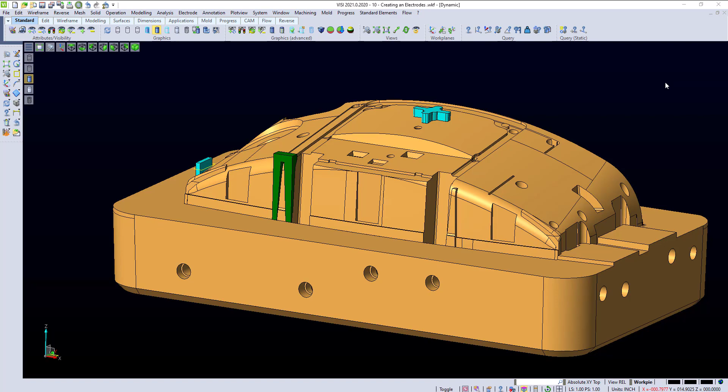In this video, we're going to go over the process of putting a holder on an electrode that you've created. To do this process, we're going to go into Electrode and down to Electrode Manager. Inside of Electrode Manager, we're going to add a new project. You have to put a name to the project, the other ones don't matter.

Then we're going to select the workpiece, and the workpiece will come in as whatever the workpiece has been named in. And then you need to name the EDM group. This group could be whatever you want the group name to be. If you wanted it to be named cavity or core, you could name it whatever you'd like.

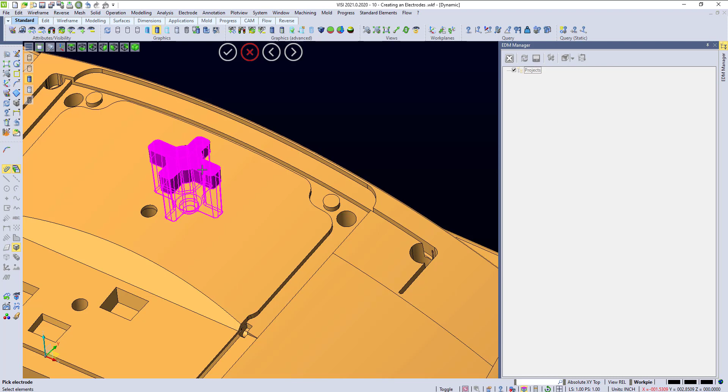Now it's going to ask you to pick an electrode. So we're going to pick this electrode, and it'll tell us that this electrode, this solid, is not an electrode. Do we want to define it as one? And we're going to just click yes. Once we click yes, you'll see that it starts to create a stock block on the back of the electrode.

With this stock block, it's real simple and easy to change the sizes of this stock block to whatever size you desire. You can also change the total height of the electrode, or you can come down and change the location.

If we want to put it on even numbers, it's as simple as just clicking this up, and we instantly put it on even numbers. It makes it very quick and easy to make sure your electrode is centered on even numbers to be able to post to the burner easier.

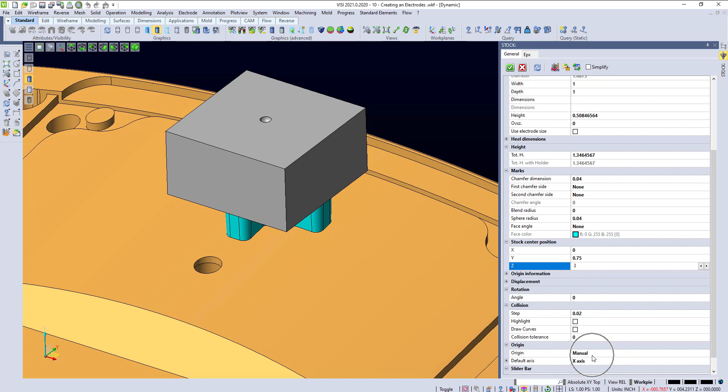The other thing we want to do is we want to make sure that we are in the manual origin mode. And what manual origin mode allows us to do is to pick the machining location for the electrode once we've made it.

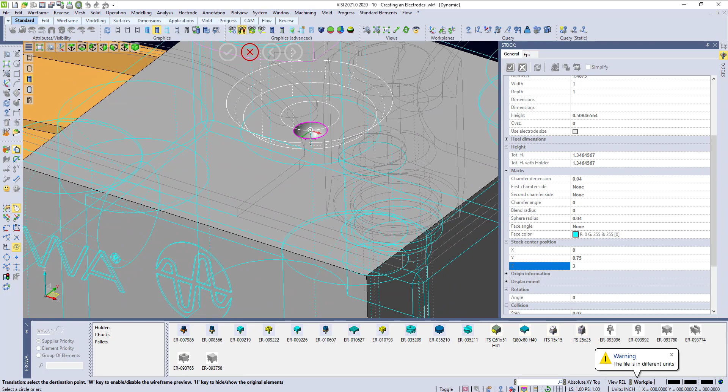Now what we can do is add a holder from the library. So I can go in here and pick one of my EROWA holders. If I hit the W key on the keyboard, it moves to wireframe and makes it real easy to place this holder on the back of the tool. Once the holder is placed, if you don't have enough height, you can come into either the total height or the Z value and bump that height up.

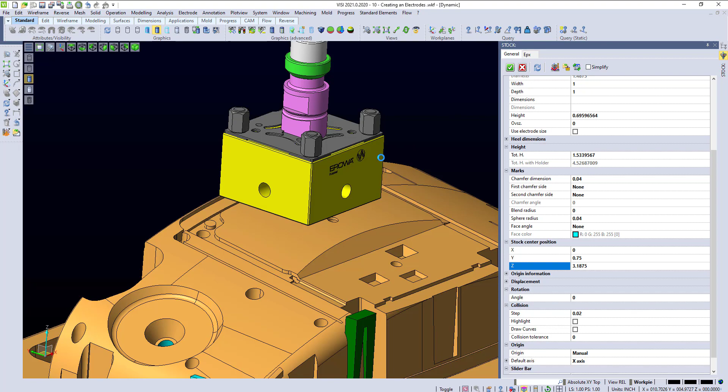We have another option that allows us to check for collisions. I can check for collisions, and it'll check this part to see if this holder hits the job anywhere, and it tells us that there has been collisions detected. So it lifts the holder up the amount that it was colliding by. Since it lifts it up by that amount, what we're going to do is just crank this number up to get this holder up and out of the way.

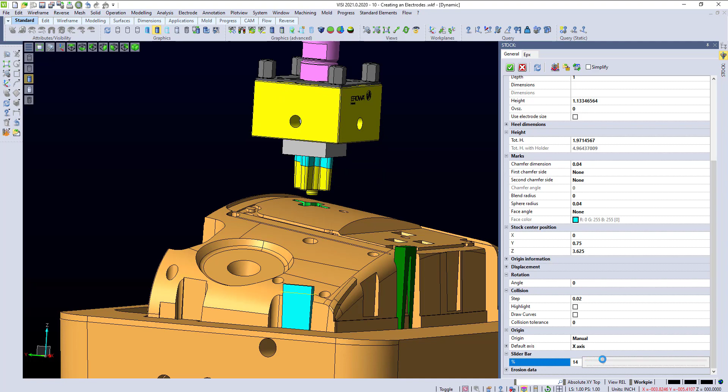And now we can see, if we go back to our slider bar, we've got our electrode created and it's ready to go to be manufactured. We go ahead and hit apply. It's going to ask us for our 0 location of our machining. Go ahead and click OK and OK. And now we've created our electrode and we can move on to our next electrode.